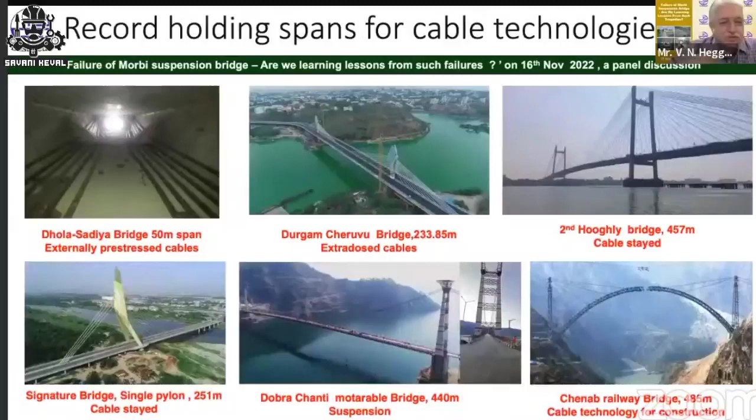All of you know that on the fateful day of October 30th at 6:40, one of the oldest suspension bridges, nearly 150 years old, collapsed, leading to a catastrophe resulting in the casualties of 135 persons, including injuries to 180 persons.

All of you are able to hear, right, Alok? Yeah, loud and clear. I have to adjust the volume of my computer. Professor Tandon, I think you'll have to mute yourself.

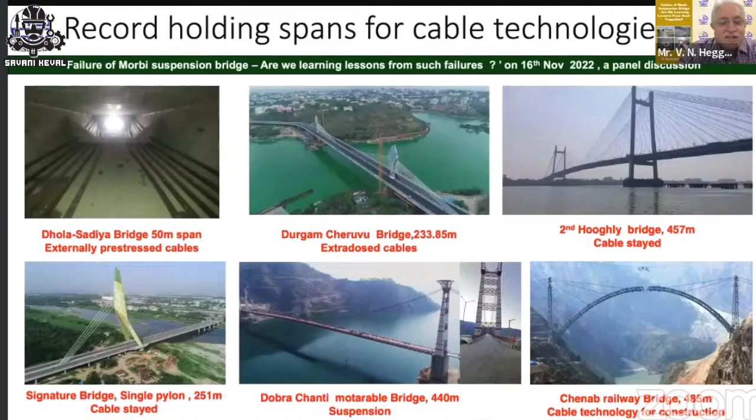The suspension bridge which collapsed in Morbi belonged to the category of cable-supported bridges, one of the variations of cable-supported bridges. I want to give you the background of cable-supported bridges before enumerating the whole collapse of the Morbi suspension bridge itself.

In India, there are 4 to 5 categories of cable-supported bridges: the externally prestressed cable bridge, the extradosed bridge, the cable-stay bridge, the suspension bridge, and in some cases we also use cable technology for construction of arch bridges, as you can see here.

Among them, the record-holding bridges: the Durgam Cheruvu bridge is under the extradosed category bridges and holds a record, while the second Hooghly bridge has a record of 457 meters middle span.

The recently constructed signature bridge, an asymmetrical cable-stay bridge with a span of 251 meters on one side of the cantilever, holds the record, while the latest Dobra Chanti bridge is a suspension bridge holding the record at 440 meters. The Chenab bridge is an engineering marvel constructed by Afcons, holding the record for a 485 meter arch bridge constructed using cable technology.

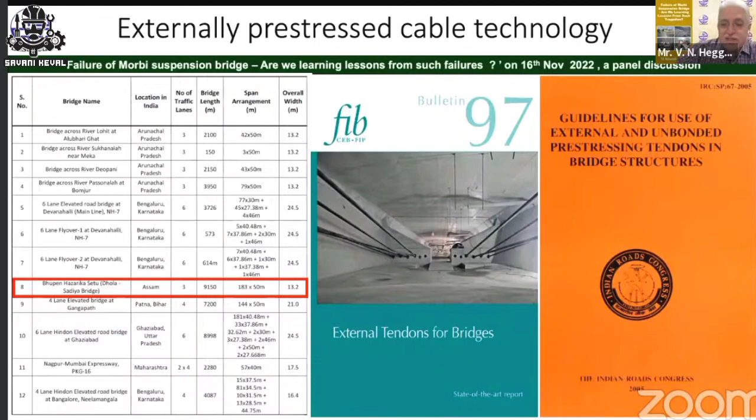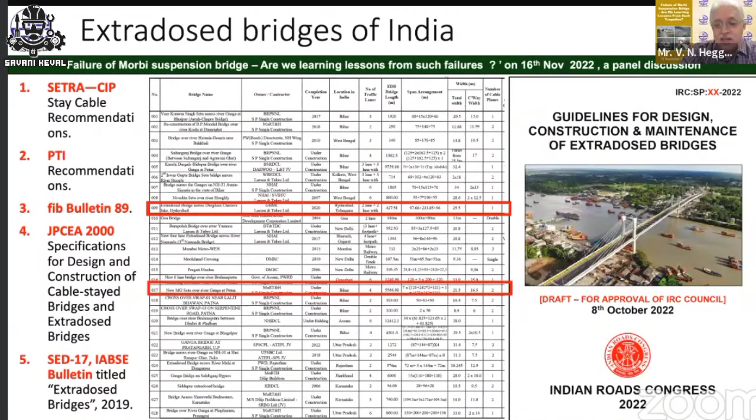Coming to the extradosed bridge, including those under construction, nearly 30 extradosed bridges are in the country. Recently in the IRC Council, we approved the guidelines of the extradosed bridges, as you can see on the right side, which was a much-awaited guideline that has come into the picture.

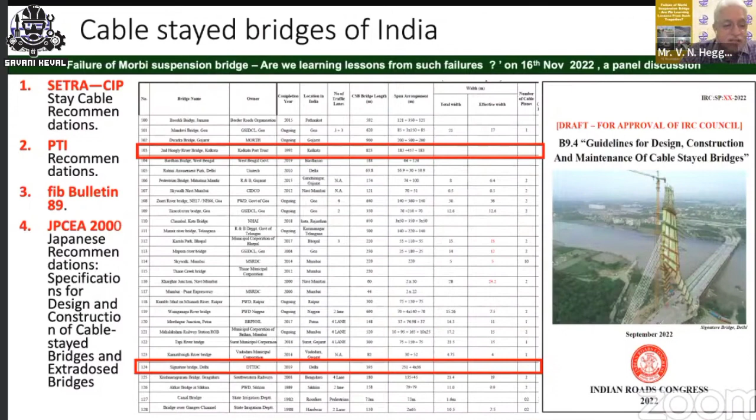Similarly, there was no state-of-the-art guideline on the design and construction of the cable-stay bridge. Almost nearly 30 cable-stay bridges are there in the country, both under construction and already constructed.

Now coming to today's topic of the Morbi suspension bridge failure, it's very interesting to note that the suspension bridge is the oldest form of cable-supported bridge. In fact, in the country there are around 633 suspension bridges, including those already removed, those under construction, and those more than 100 years old which can be called heritage structures.

Most of these suspension bridges, constructed, under construction, or removed, are in the sub-Himalayan terrain, where numerous gorges require such construction. It's interesting to note that the Kidderpore Bridge is the first motorable suspension bridge, similar to the Kalighat Bridge in Kolkata, both constructed in 1822. So the suspension bridge form was constructed in India way back in 1822.

And many of those bridges, as I said, almost around 50 to 60% have already been removed, but some of the bridges are still standing.

I just want to bring to the notice of all participants that the Punular Bridge has significance in the sense that it is the still-existing oldest suspension bridge, constructed in 1877, almost at the same time as the Morbi suspension bridge.

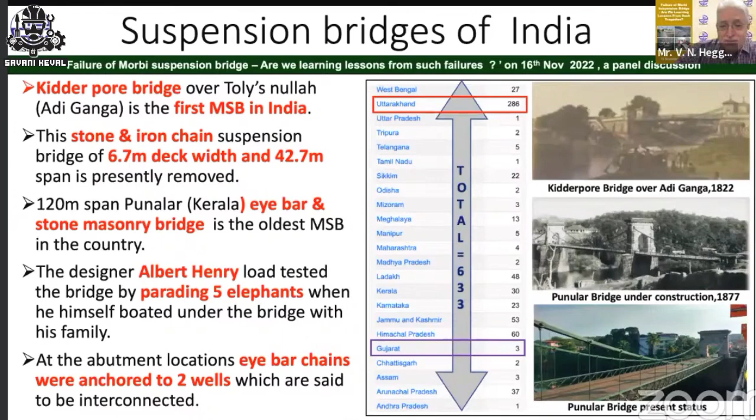In the earlier days, in the initial stages of suspension bridges, the pylons used to be made of stone masonry, and the main load-bearing element, basically the suspension cables, were made of eye bar chain or iron chain, as you can see here.

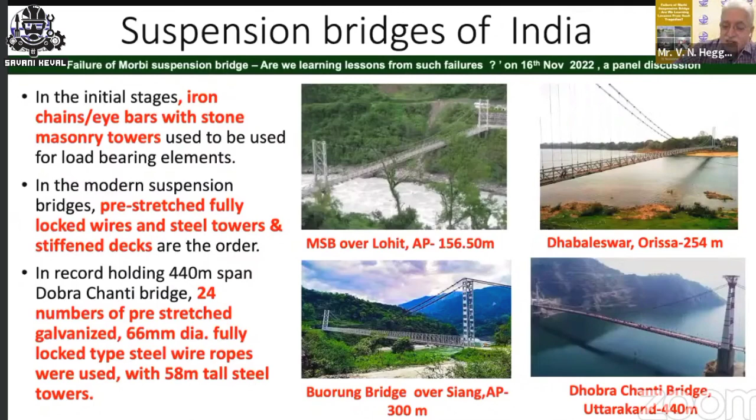Also in the earlier days, the decks used to be unstiffened, whereas in the latest modern suspension bridges, normally the decks are stiffened. These are stiffened in the form of a truss, steel trusses, as you can see here.

Now coming to today's topic of the Morbi suspension bridge failure, we can see this is a 230-meter overall length bridge, constructed way back in 1870 to 1880 by the Maharaja of Morbi, Waghji Thakor. It's almost more than 140 years old.

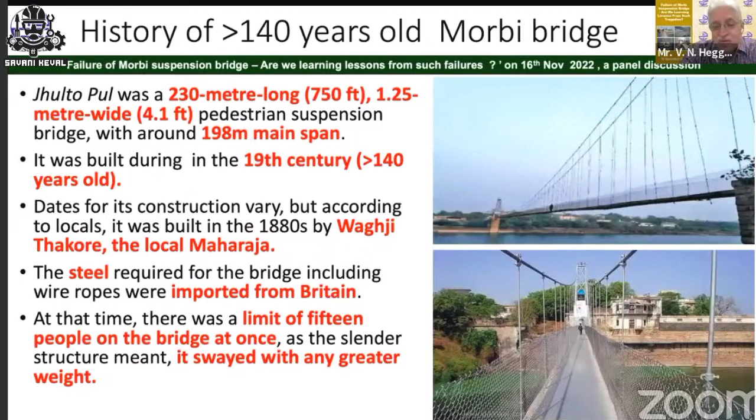For this particular bridge, the steel elements were bought, imported from Britain. Very important point to note: when this bridge was constructed, the limit was only 15 people on the bridge, keeping in view that due to the weight, the bridge should not sway, and the sway should not lead to any catastrophe. So the limitation was only 15 people.

This bridge was owned by the Morbi municipality, and the contract for repairs as well as maintenance was given to a contractor called Oreva, and it has been in the media and under discussion.

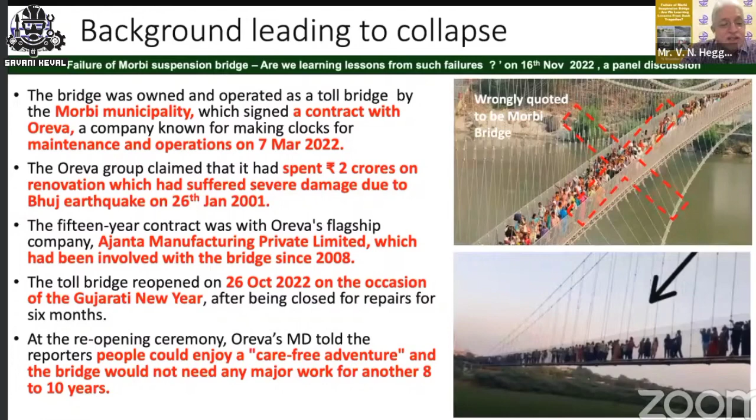This particular bridge was repaired for 2 crore rupees after being closed for 6 months, and famously the owner of the Oreva company, basically a clock or watch making company, said that people could enjoy a carefree adventure and the bridge would not need any major work for another 8 to 10 years. That's how it happened.

As I said, on the fateful day of 30th October 2022, the bridge collapsed, and it was said that the bridge had exceeded its capacity of 125 people, whereas 500 people were on top of the bridge, as has been alleged. But I don't understand the rationality or logic of how it has been said that the capacity of the bridge is 125.

No designer or constructor with experience in the design of cable-stayed or cable-supported bridges has done an evaluation and design-wise come to the conclusion that the bridge capacity is 125. But let us say the capacity of the bridge is 125 as has been said, and the number of people on the bridge was 500.

It's also said that the bridge violently shook before the collapse. As you can see here, just for information, in the figure a couple of people seem to be really shaking the bridge very violently.

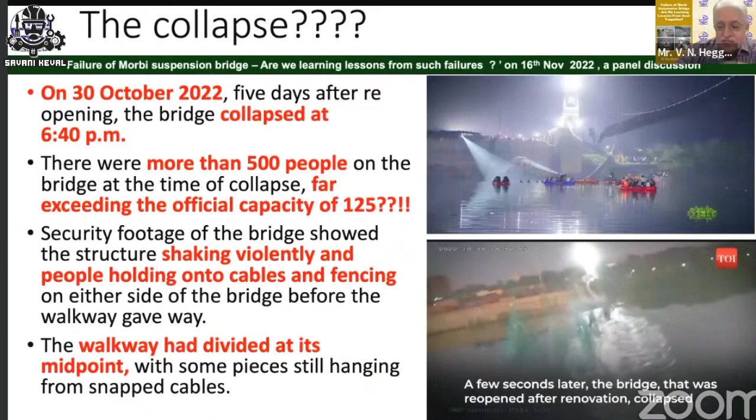I'm not able to decide whether, because of the shaking of the bridge, the person was looking to be shaking, or the person was initiating the shaking. That's not very clear. But anyway, it can be seen very clearly from the video which has been floating around that the bridge was vibrating or swaying or oscillating, in a way which led to the collapse of the bridge.

Very interestingly, during the forensic investigation presented to the court, it is said that the cables, the main load carrying elements, were rusted. Also, a 5-member SIT committee has been formed after the collapse of the bridge, as has been alleged and reported in the paper. 2 managers, 2 ticket clerks, 2 subcontractors, and 3 hired security guards were arrested and were under investigation.

Looking at the history of bridge collapses in the world over the period, you can see in the table presented on the right side, there are very famous bridge collapses where more than 135 casualties were involved, only 5 such instances in the world, starting from 1275, the Sint Servasburg Bridge in Maastricht.

That was like a wooden bridge overloaded because, for celebrating a festival, people had gathered there, and 400 casualties were reported. Similarly, in Tokyo, 500 to 2,000 casualties were reported. And also in 1809 in Portugal, all these bridges are wooden bridges, noteworthy.

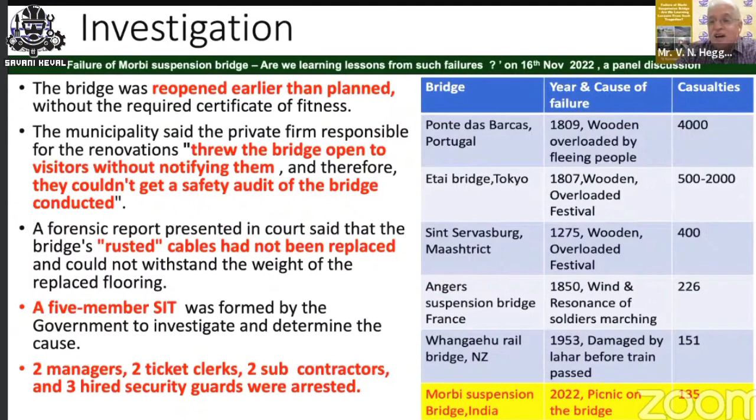Unfortunately, the Morbi suspension bridge failure is an unprecedented bridge failure in our country, and I think it has resulted in the highest casualty of any bridge collapse in our country. 135 casualties have not taken place in any other bridge collapse in our country. Even in the world, if you really look at it, starting from 1275, it ranks at 6. That is the gravity of the situation we are faced with.

Now there are a lot of unanswered questions when we come to this. There are many questions which have been plaguing us as an engineering fraternity, as a moral and ethical obligation to the society. These questions have to be answered. We thought we'll be having a panel discussion to seek answers to these questions.

Some of the questions that can be answered during this panel discussion are: should suspension bridges in excess of 100 years, especially those not designed and built with advanced technology, be in service, or should they be considered heritage structures only with no proposals passed on them? Can high-end technology bridges like cable-supported bridges be repaired, maintained, and operated by any agency which doesn't have experience in designing and construction of these bridges?

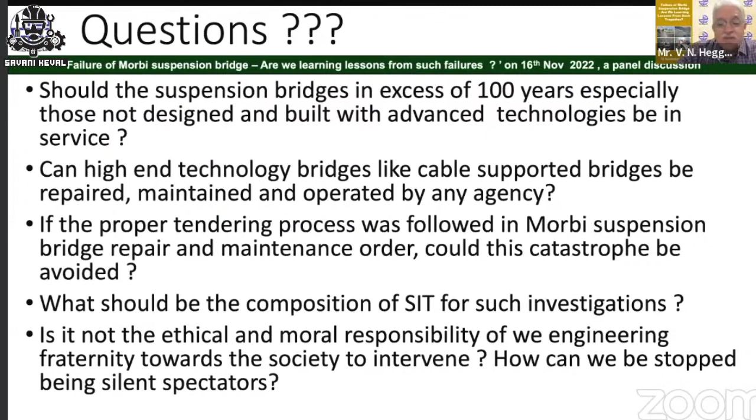If the proper tendering process was followed in the Morbi suspension bridge repair and maintenance order, could this catastrophe be avoided? What should be the composition of the SIT for such an investigation? And finally, and not the least, is it not the ethical and moral responsibility of we engineering fraternity towards society to intervene? How can we stop being silent spectators? These questions need to be really answered by us.

You have also thrown a question as to whether such old bridges should continue to be used. You see, immediately after the failure of that bridge, there were umpteen TV channels giving discourse on the failure, the reason for the failure, and how bridges should be looked after, by eminent experts all over the country. So most of us have got our earful of advice on bridges, and by now, through the media, we know what the bridge was.

You have also explained it's one of the longer bridges. But what was very unusual about Morbi? First of all, it's a suspension bridge. We are more accustomed to seeing girder bridges, steel truss bridges, and also arch bridges sometimes. In urban areas, we seldom see suspension bridges, and we seldom saw them prior to the Vidyasagar Setu being constructed in a city itself.

This particular bridge was manufactured and supplied from the UK. It's a bridge owned by a person, maybe gifted to him or he spent money to get it done. It's a long span, manufactured in 1879. There was no steel at that time, only wrought iron, which was also called early steel, but that came after 1885 or so. This was for use by a person and his courtiers.

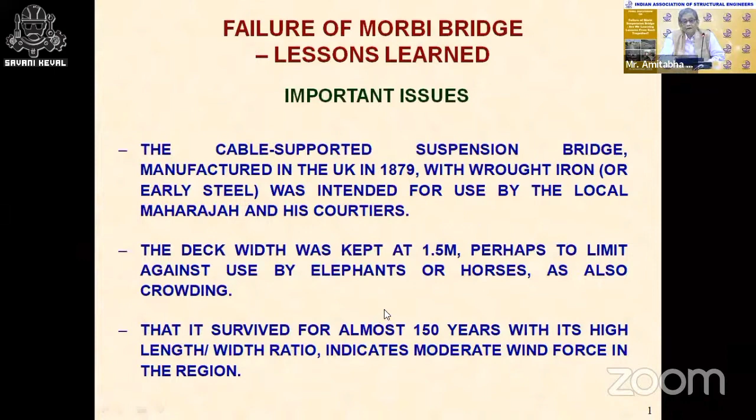Now, I think I will just show you by the time you change the screen.

As we said, this is a cable-supported suspension bridge. When talking about suspension bridges, I cannot resist mentioning that the suspension bridge is one type of bridge considered India's contribution to the world. Much as the arch bridge is credited to the Romans or cantilever bridges to the Chinese, it is the Indians, particularly in the sub-Himalayan region, who have been using suspension bridges for maybe 2000 years.

The concept of a suspension bridge comes from nature. Even creepers can cross a valley, extending from trees to create a bridge. Our ancestors, the monkeys, could link with each other and create a bridge across an opening, and they used to cross like that, with the last ones hanging and going to the other side. So the concept was there, and it was for human beings to adopt that by using a rope and then hanging a deck.

What was India's contribution? The Indian contribution or innovation was, instead of using one rope, to use two ropes, give hangers, and make a deck which is horizontal and extremely passable. Instead of hanging with a catenary cable and going by jhula across the bridge, we made a proper deck through which people or animals could cross. So this is the Indian contribution, besides what we are going to discuss.

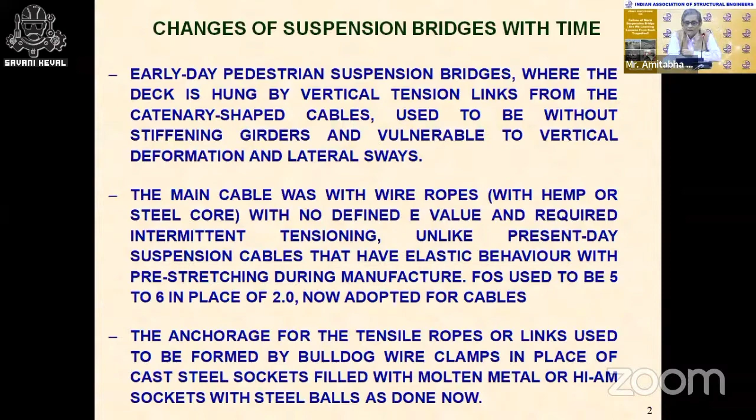Today, instead, you have got cast steel sockets, and you secure the cable with molten metal or even Hi-Am sockets, and therefore they are in a much firmer situation. So the change in suspension bridge technology has brought in a much more stable structure than what used to be earlier. But all the same, those old suspension bridges have survived - as moderator mentioned, this is a bridge which has survived 150 years.

And there are other bridges in the Himalayas. We don't keep any record. We do not know how long they have been there, but they are still being used, or they have been put to disuse. The problem is India is a large country, spread out, and you have got a large number of such bridges. Nobody ever heard of Morbi bridge, at least in this part of the world. Nobody had heard that there is a bridge 150 years old, 250-meter span. I have been working with suspension bridges, but I had never heard of this one.

There are also a lot of other structures which can be vulnerable. Like we see in abandoned brick kilns, abandoned power units, abandoned chimneys which may be 100 meters high. And they have got trees grown on top of them. They are deteriorating, they are falling down, but nobody takes care of them because they are in abandoned areas.

And all such structures are being maintained by bodies like municipalities and panchayats, who have no engineering strength, who have no management capacity. And the result has been visible in Morbi, where this heritage structure, an engineering marvel of such antiquity, has been given to a commercial organization for use as an amusement item, for people to come and enjoy the ride.

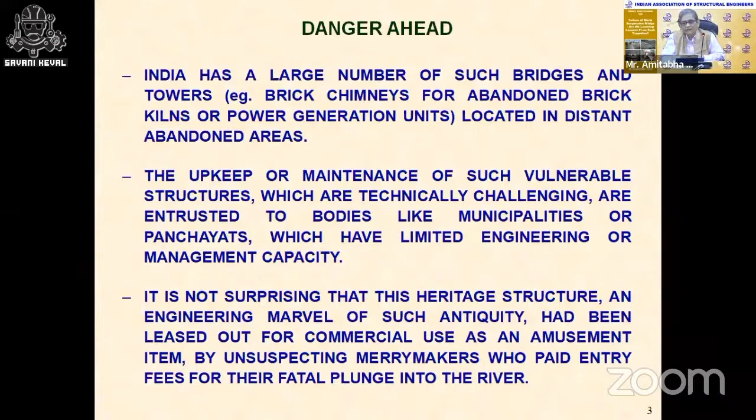It is sad that so many people paid their entry fee for a fatal plunge into the river. And some of them have suffered so much and are still recuperating. There needs to be something done about the way such structures are being handled.

This particular failure has given us an insight, an impetus to think about the future. More than understanding or finding reasons for the failure, what we in the engineering fraternity need to do is have an introspection and decide what can be done in the future so that no such tragedies happen again - rather than simply blaming the engineers for being careless.

It is important that all such vulnerable structures must be identified, country-wise, and we should have a register for this. We must have knowledge that there are such structures which are vulnerable and they should be taken care of. Health monitoring of such complex structures, and their rehabilitation, cannot be done by all and sundry - it cannot be just tendered out and given to a contractor for the job.

The upkeep or maintenance should be given either to recognized academic institutions as their responsibility, or we should appoint consultants or such agencies who can take charge of a bridge and will be accountable in case there is a failure or deterioration. In the USA, firms like T.Y. Lin and many other consultants have been given charge of suspension bridges and other long-span bridges. The Brooklyn Bridge is also given to the original developer.

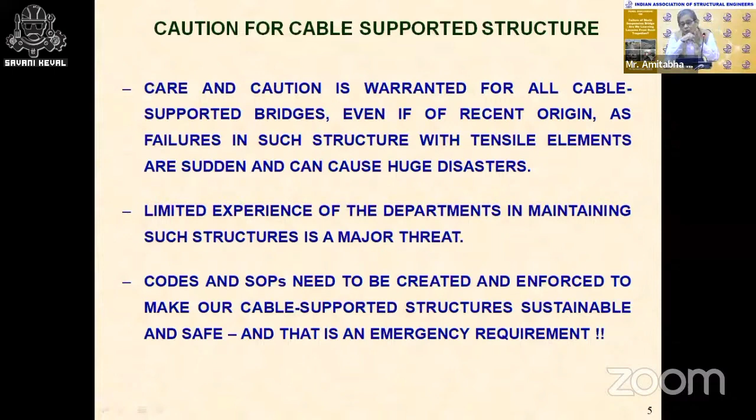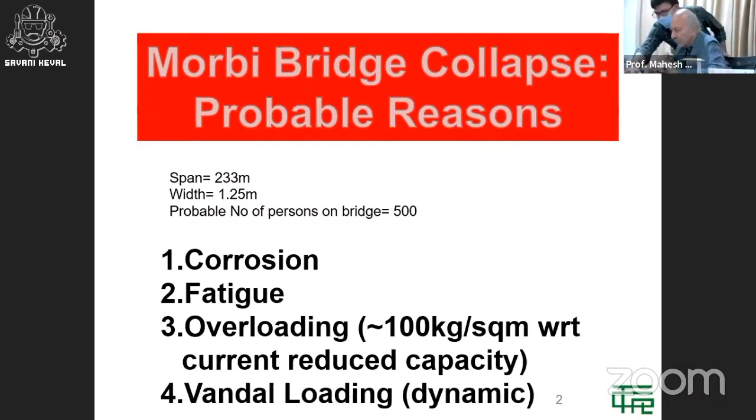Yeah, you can change that. Oh, okay. Good.

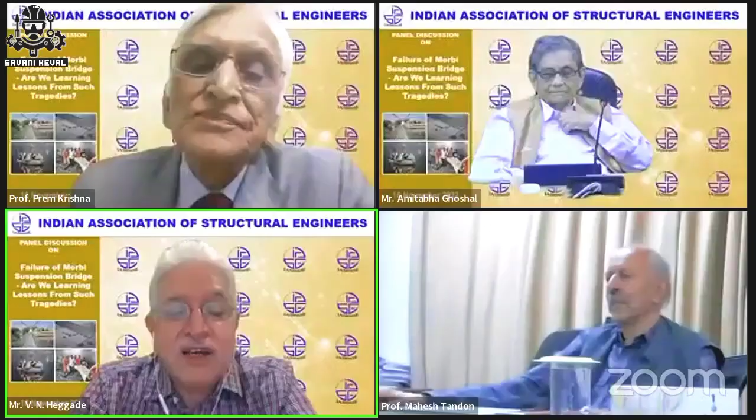Professor Prem Krishna, I'm coming to you now. You have decades of experience similar to Mr. Amitabh Ghoshal, and additionally experience in the academic field. You have been advisor to government departments as well as for cable-supported bridges. I remember you were involved in the Haridwar cable stay bridge and many more, and you're an expert in wind design and construction of wind-sensitive structures. I'd like to highlight that there are almost 633 suspension bridges, out of which almost 50% may have been removed by now and may not be in existence, and many of them are 100 years old. Even now, suspension bridges, both pedestrian and motorable, are being designed and constructed in the country, and I don't see any guideline being there for this kind of bridge.

In the Morbi bridge, particularly, the main load-bearing element cables are said to have been corroded. That's what one of the forensic studies says, and it was not obviously repaired properly, as we can see here, though 2 crore rupees for repairs was sent. Can the maintenance and repair of such bridges be done by a contractor who does not have exposure and experience in designing and constructing such high-end technology bridges? Would you like to highlight on that and any other issues you want to speak about?

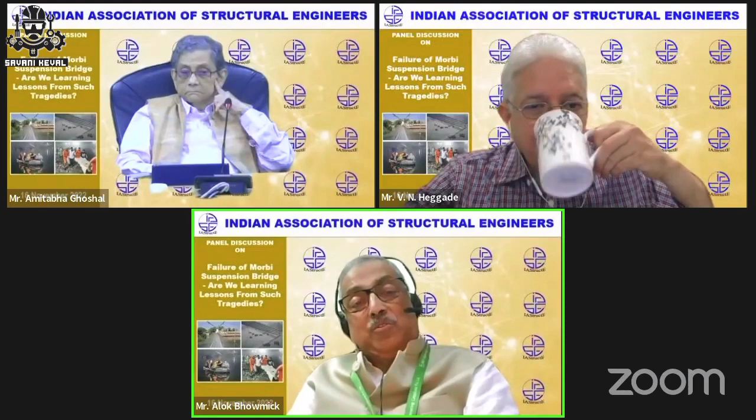There also needs to be a conclusion by such committees to improve the technical capacities and capabilities of civic bodies. We have to review the nature of the public-private partnership model, which is now increasing everywhere. Almost all the projects are in private-public mode.

One has to go into the technical details and forensic investigation of how this bridge has failed technically. I don't think this committee alone should be able to go through all these aspects. Probably it would be good if the government of Gujarat also comes out with another hardcore technical committee whose job should not be to find a scapegoat, but to find the real root cause of failure of this particular bridge.

We must know, at the end of the day, we have lost 135 lives here, and it is probably one of the most disastrous failures in recent times in 21st century India. No other failure has caused so many loss of lives. So it is very important to know what should be the course of action for the rest of the bridges we have as assets, and what is their state of affairs.

Should I stop here, or can I cover other aspects also, if you permit me? Yeah, I think during the panel discussions I would like to take some questions, and if time permits we can go ahead. Alok, let us proceed, I think many questions have been asked.

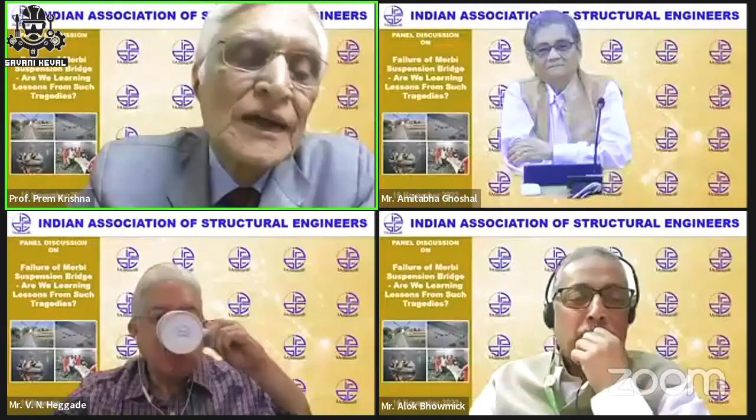Very interestingly, the longest suspension bridge is the Akashi Kaikyo. The span was supposed to be between towers 1990 meters, and actually it is 1991.6 meters. The reason for this 1.6 meter displacement is the Kobe earthquake. So I always say it is only a suspension bridge which can take that kind of misuse, or disuse, if I may say - that something changes the span by 1.6 meters and still nothing goes wrong.

So my hunch is, I don't know, I'm speaking without knowledge, as to what kind of damage would have occurred to the Morbi bridge because of the earthquake. The second thing is, as Mr. Ghoshal said, it could be that some hanger or some local failure took place, and because of the failure, serious bending occurred in the cable. Therefore, besides the axial force, some serious bending stresses occurred, and that combined could have meant the failure.

Heggade Saab, can I come in here for just a minute? Yeah, please. I just want to show, regarding what Mr. Ghoshal said - I can prove that is precisely what has happened by showing you just one slide of a photograph which I have picked up from Google.

You see, I think I will change my display setting. No, it's seen, there is no issue on that.

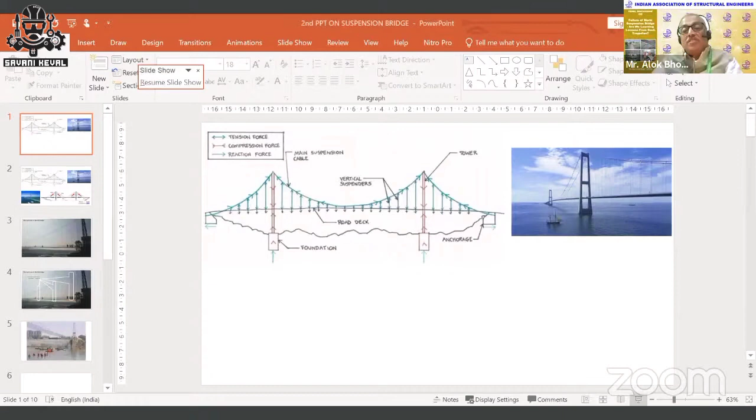I hope you are able to see my screen. Yes, we are seeing the first slide, right? Just a minute sir, I think maybe I will stop share and do it again. Maybe there is some issue, no, because there was another photograph on that, it was not Morbi Bridge. So we're not sure whether it was Morbi. Wait, then I think maybe it's the third slide. Dr. Harsha is saying it's the third slide. Then you go to the presentation mode. Is it coming? It is seen, but okay fine, I think it can be seen. You're not in the presentation mode, but it can be seen. That's okay, it's okay.

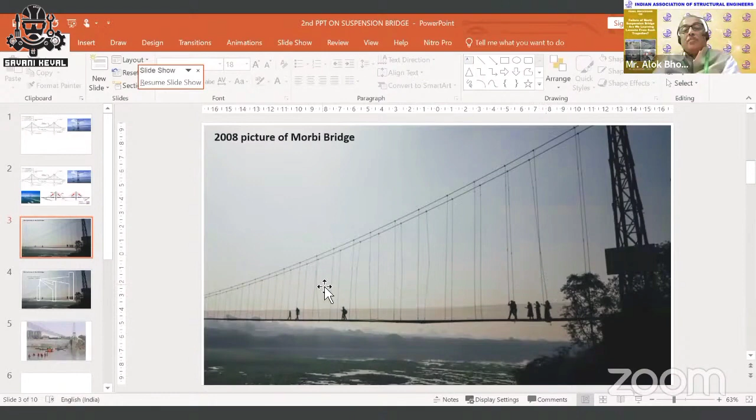You can see here it is crossing, which indicates that... you can see the deck here. It is not crossing, it's a visual illusion. Yes, it's crossing in the sense I'm saying, I understand it is a visual illusion, but it is in fact so much that in any view you are supposed to get these two lines parallel.

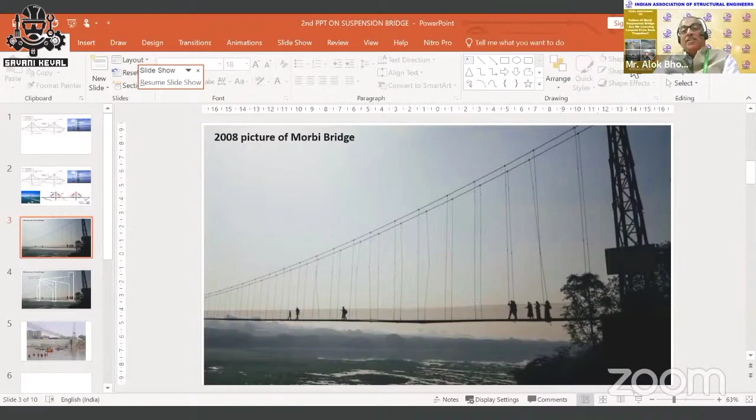It is not there, which seems to indicate to me that because of these suspenders... but in a suspension bridge, failure of a suspender or it not being taut does not mean a global failure, it only means a localized effect. But that may have a bending effect on the main suspension cable, which Professor was mentioning.

Another interesting point, I think Professor Prem Krishna as well as others also deliberated upon: when this bridge was repaired, basically the deck was a wooden plank. The weight of the wooden plank would have been more, so the wooden plank has been replaced with a steel plate. What is the repair they have done? They have replaced the wooden plank with the steel plate, and they have done some sort of painting for the bridge. That's all the repair as far as the bridge is concerned.

Certainly, that would change the dynamic characteristics of the bridge. The wooden plank would have more damping effect than the steel plate, which would have become lighter. Maybe they thought that by replacing the wooden plank, the carrying capacity of the bridge is increased because the weight of the wooden plank is more than that of the steel plate. That is the understanding. I think that's what I saw in one of the media reports also, but it would have changed the entire dynamic characteristics of the bridge.

Would you like to throw some light on that, Professor Prem Krishna? The changing of the wooden plank to the steel plate also will aggravate the situation, in my opinion. It will probably, but to me it seems that it has got fatigued.